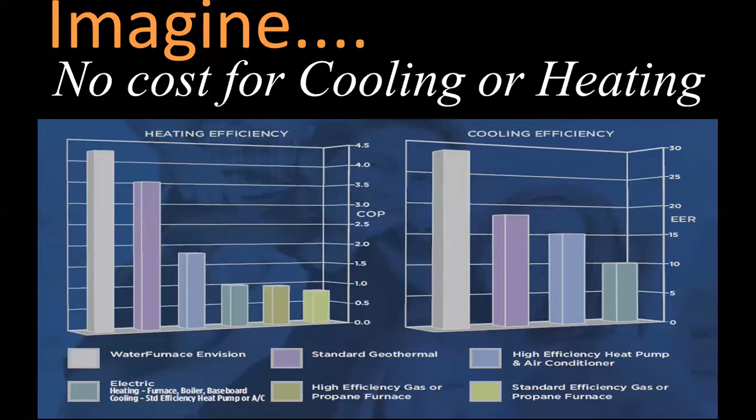These are buildings which are standalone from the electrical grid. There is no cost for running the air conditioners or for running geysers for hot water in the winters. They utilize natural resources. They live in harmony with nature. They're built in harmony with nature. These are the buildings which have the lowest possible carbon footprint. And that's truly what an earth-friendly or environment-friendly building will be all about. And that's what we'll call a net zero energy building.

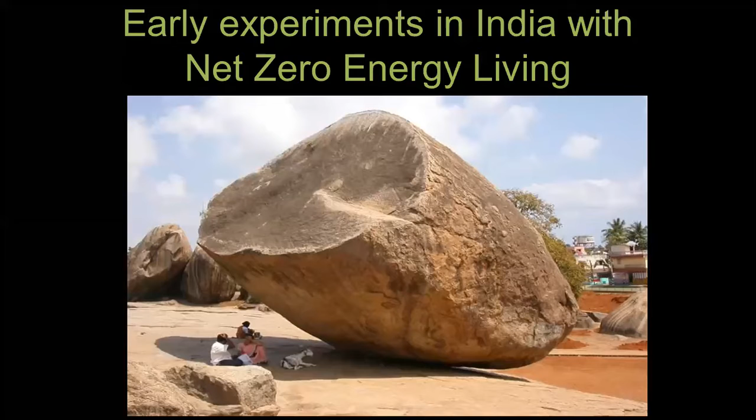The concept has been around with us for a long time. If you look at the history of mankind, over years, we have lived in harmony with nature. It's only in the last few decades that our greed took over. And in that process, we started extracting more from earth than giving back to her. And that's where the imbalance came into the picture, and we now have to start worrying about harmonizing with nature. Man has always in the past respected and worked around nature. And that's what we need to go back to, to achieve the status of net zero buildings.

Net zero buildings are broadly categorized into four. The first is net zero energy buildings. These are buildings where we are neutral with respect to the electricity grid, the grid which provides us the power which comes from the government. That means the power we draw is the power we send back to the grid, and hence we are zero with respect to that. There are many such buildings operational in the world today. When I say many, I don't mean hundreds and thousands. There could be a handful of them today, but this is where the world is going. There are examples of these buildings in India also. My guess would be somewhere in the range of about 10 to 20 such buildings in India at this point of time.

The next is net zero water buildings. These are the buildings where we are neutral with respect to the water coming to us from municipal resources. That means we do not take anything from the municipality. We are completely relying on what the rain gods provide to us. The focus of these buildings is on water conservation and storage. Such buildings are already being tried out. Currently, I may not be able to cite an example of such a building in India, but I can tell you that such buildings are currently under design.

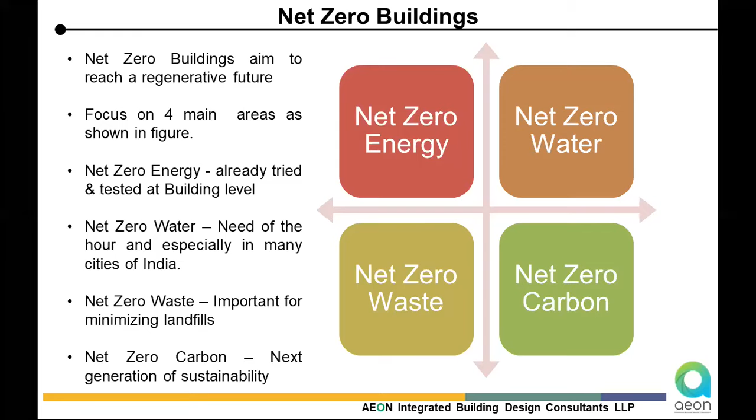The ultimate would be what we call a carbon neutral building. This is where we are in complete harmony. We are not adding anything to the carbon emissions. This would be the step we'd achieve once we have done net zero energy, net zero water, and net zero waste buildings. It will be a natural progression to move toward net zero carbon. Currently, we are a little away from this, but that's what we are aiming for, and that's where we need to go if we need to harmonize with mother nature.

How do you go in defining what net zero energy buildings are? Generally, in case of India, renewable energy source would mean solar, because God has given us plenty of sun energy. Since we have plenty of sun energy, that's what we typically like to refer, even though our country is blessed with wind resources, with biomass, but generally we speak about solar.

When you got solar energy, you can do generation when the sun is out, and that happens in the daytime. How do you run the building in the night time? There are two ways of doing that. One is that you store the electricity in batteries, but storage would mean it's expensive, and then it may not be environment friendly also. So what we do in such buildings is we generate excess power more than what we require for running the building in the daytime, send it to the electrical grid, the government grid, and in the night time draw the power back from there.

The electrical meter that you got, which is monitoring the net power which goes out and the power which is imported from the grid, the net sum of it should reach zero, and that is why it is called net zero energy buildings. Mind it, the world over, the term is net zero energy buildings, not zero energy buildings. It's a standard term, and that's how the buildings are defined.

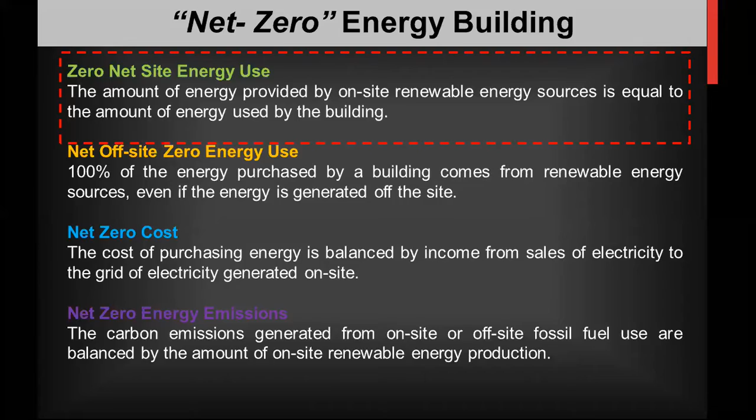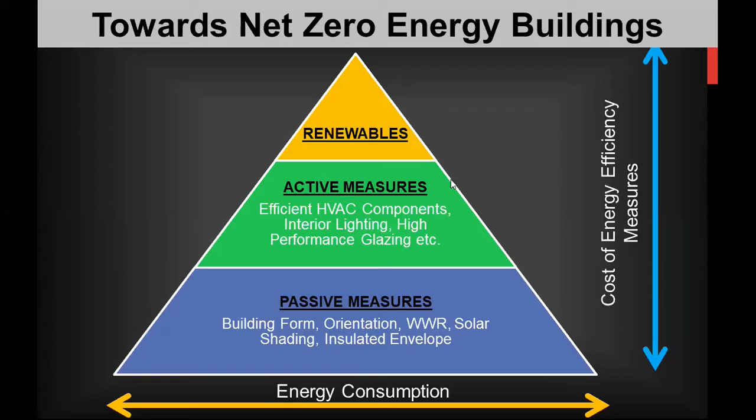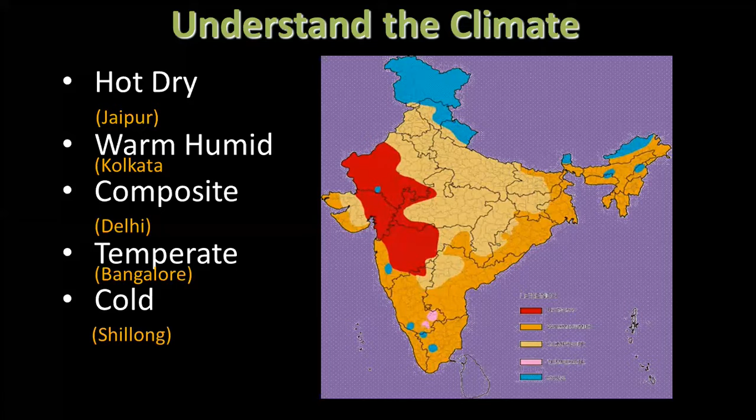All right, so that was the message of ASHRAE, how to go around designing net zero energy building. It was very similar to what I spoke about. Where do we start? Fundamental, go down to basics. And if you stick to basics, you can never go wrong. First, understand the climate for which you are designing. You cannot have a same building being built in a hot climate and the same thing being done in a city like Bangalore, which has got a different kind of climate.

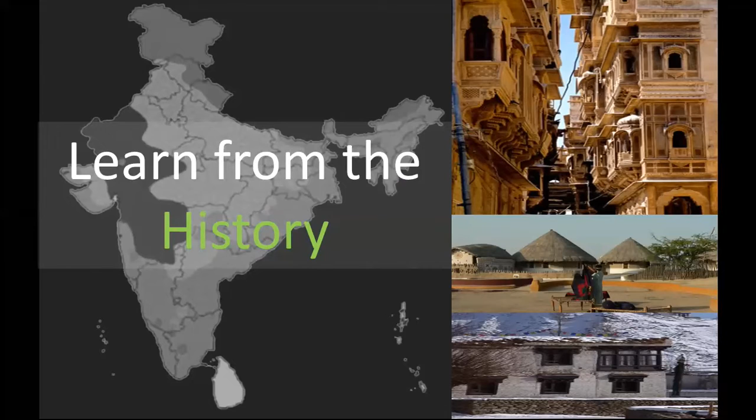Secondly, learn from the history. If you look at India, every city has a history of its own. Every city has a different kind of buildings which were done. Ask any architecture student, he or she will tell you the importance of that building design which was done historically by our ancestors, why it was designed that way. And if you look at those basics, follow that, you cannot go wrong. Then we got science like Vastu, Panchbhutas. It's all a science.

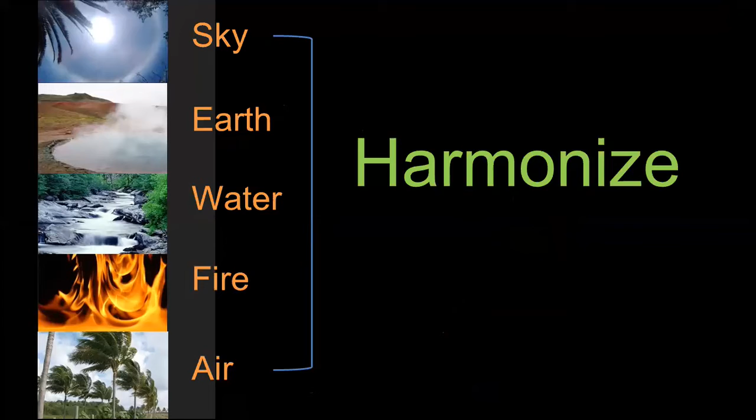Follow the science to the extent possible. What sounds right, do that. Finally, you harmonize with nature. Use the building technologies that we have, air conditioning, electrical, whatever the technology, not to fight with nature, but to harmonize with nature. And that's the fundamental of high performance building design and what we call net zero energy building design.

I'm going to take you through a couple of examples of net zero energy buildings which were done in India from the start. This is the first net zero energy building of the country, which was done in 2010-11. It's called Eco Commercial Building. It's in Greater Noida actually. And this was done by a chemical giant called Bayer. Bayer is a giant from Germany. They did it under their climate protection plan.

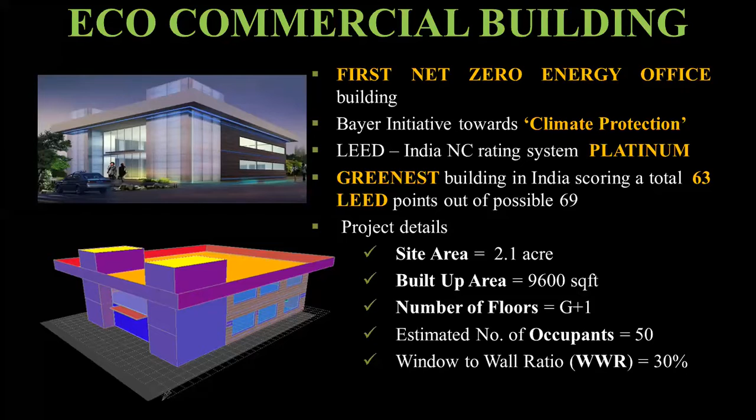The intent was to create a demonstrative building which will carry the message of what future construction would be like. So 10 years back, this building was made. In 2011, the building got completed. A small 10,000 square feet facility. When it finished, it became the greenest building in India at that point of time. I'll showcase to you the process that was followed to construct this building and how we got a net zero energy rating, or the performance, out of it.

You can see here, just by doing the right orientation, whether it's north-south, east-west, what is the best orientation? You use software to rotate the building every 45 degrees to find out the best orientation. And that orientation, once selected, saved us 1% in the annual energy bill. You will say, arey, 1%, is this what all the trouble is about? Wait and watch what happens as we go along step by step.

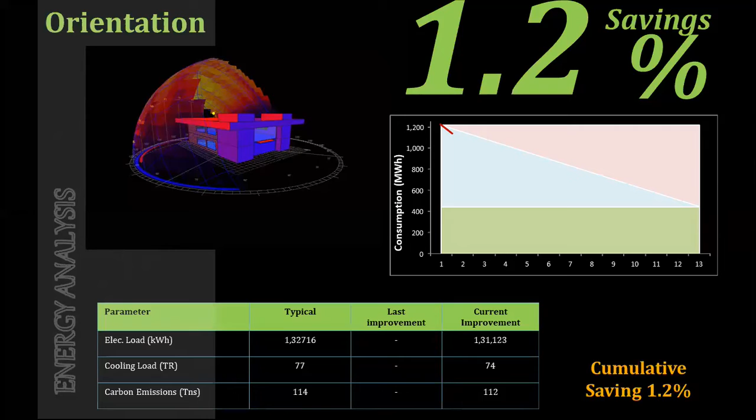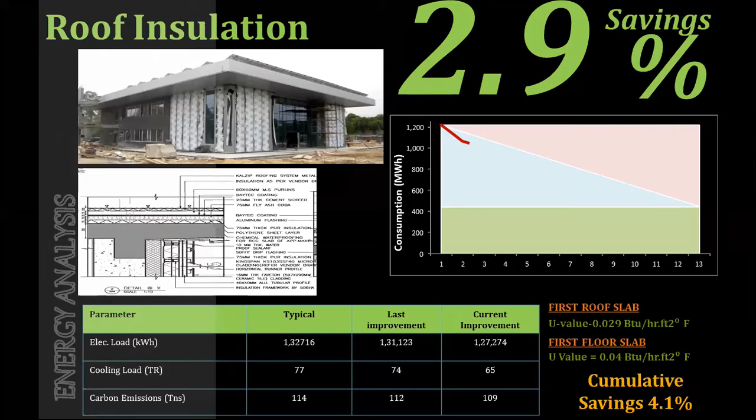The second thing we did was put in roof insulation. We are a country which is hot. Most parts of our country have a hot climate. And for us, keeping the heat out matters because we have air conditioners running inside. This building saved 3% of its annual energy bill by going for roof insulation.

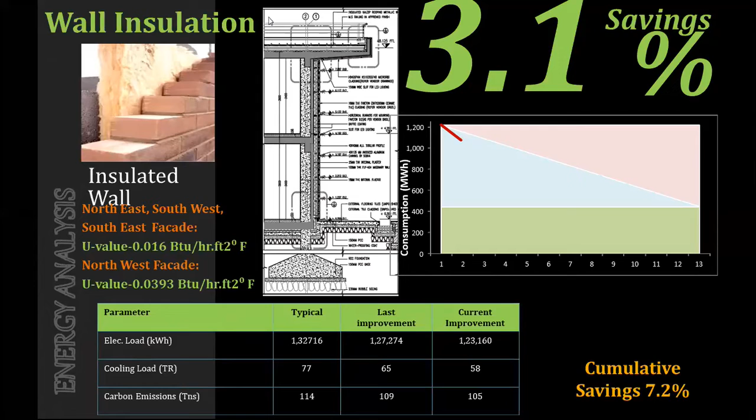Similarly, wall insulation. How many of us actually put wall insulation in our buildings? Very few, but that's the way of the future. If you're making a building in the Middle East or Europe, wall insulation is compulsory. In India, it's going to become so in the coming days. Already the government is working on that idea. The codes are out. If you look at the ECBC code, that's what needs to be done.

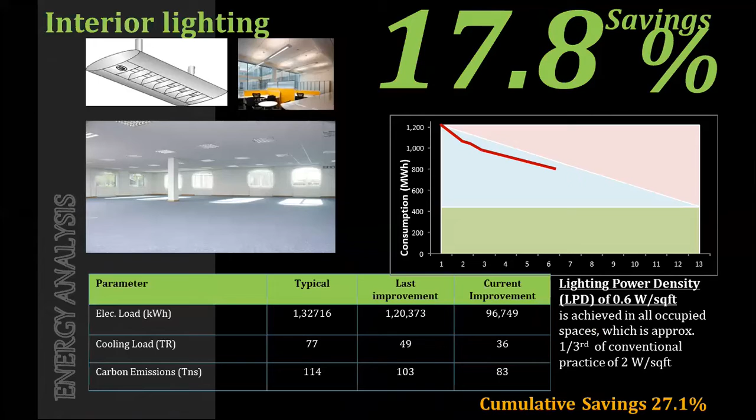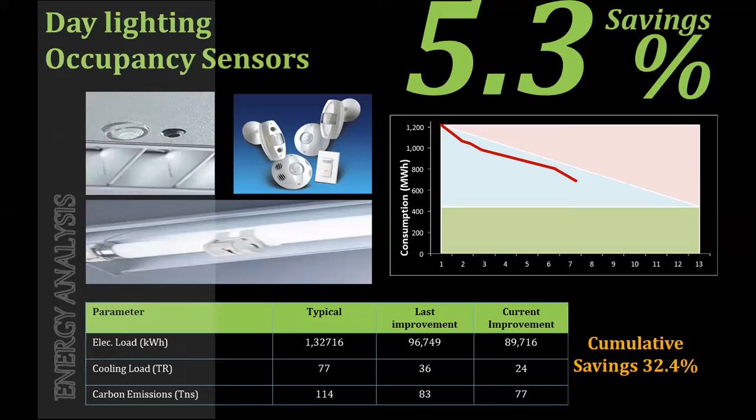Look at the window assembly: a double glazing unit and the right window wall ratio help you save further electricity. The right kind of interior lighting. Daylight sensors, that means using sensors to switch off artificial light when it's not required. If you get adequate daylight, why do I need to run the artificial light? Similarly, occupancy sensors in places like toilets, pantries, mechanical rooms, where nobody goes or goes once in a while. If I'm able to switch off the artificial light when it's not needed, I'm saving energy.

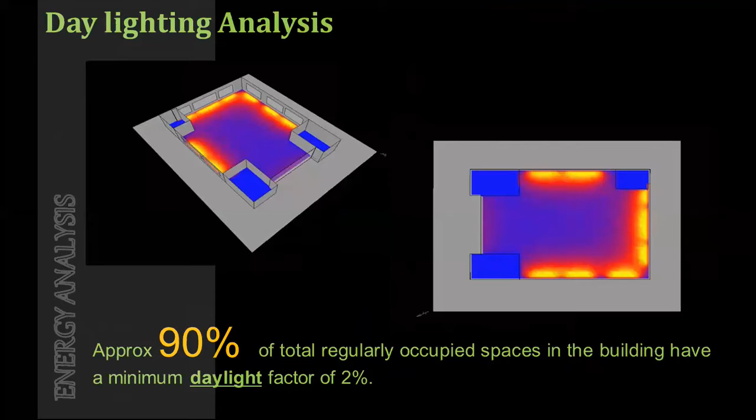External lights, using good quality, energy efficient external lights. Maximizing the daylighting. In this building 90% of the areas were daylit. Looking at equipment like photocopiers, printers, computers, buying the ones which are most efficient.

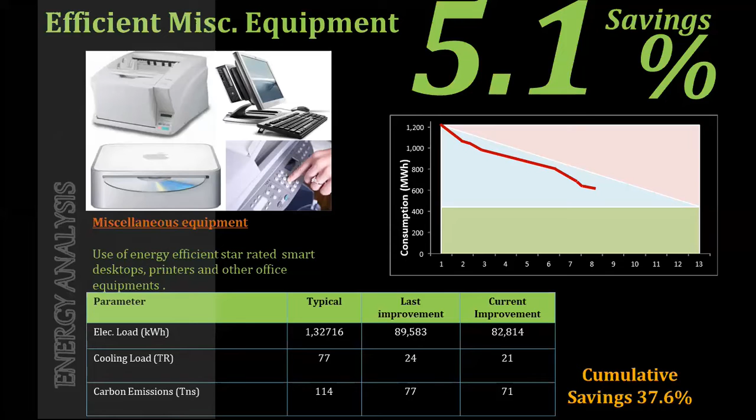I remember the time when a personal computer used to consume about 250 watts of power. Today, that power consumption is down to less than half, and it should be our endeavor to pick equipment which is least power consuming, because it's running most of the day, and you're saving energy by choosing the right ones. Similarly, the right kind of air conditioning systems.

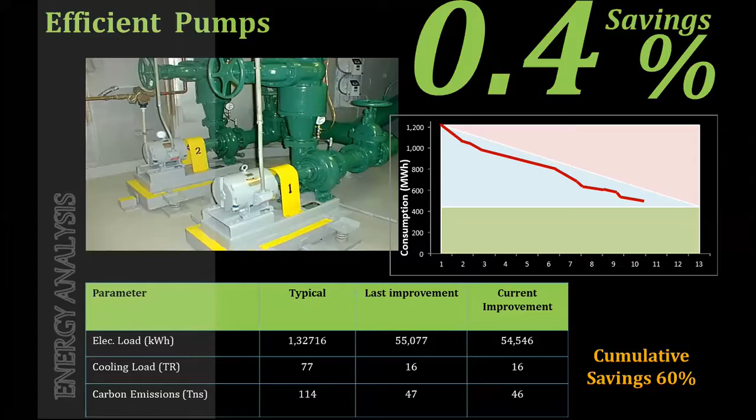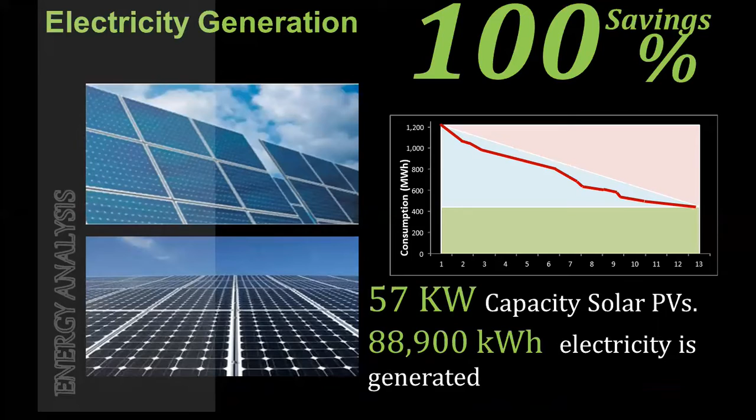I'll take you to where we reached through the step-by-step process, not going through all the details. We saved 60% power compared to where we started from. And at the end of the day, once we saved that energy through energy efficient measures, we put 57 kilowatts of solar panels on the roof to get what we call net zero energy performance. These are images of the same building in 2010 when construction was going on.

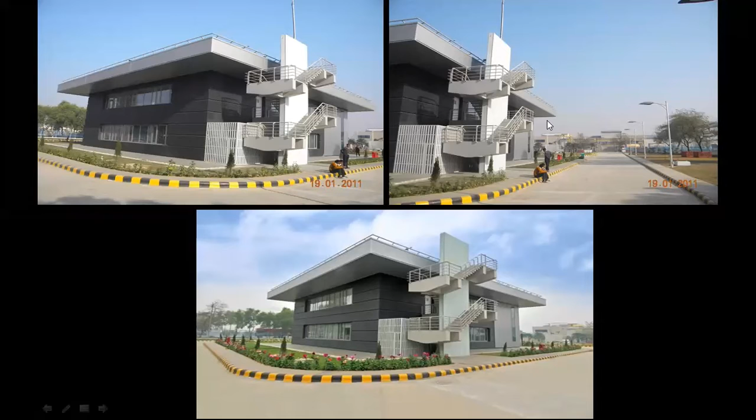You can look at the daylighting inside. And this is in 2011 when the building was finished. And again, look at the daylighting inside. These are some of the images from outside the building. And you would notice the tall overhang which is there on the roof, which you can see right here.

That overhang is actually protecting the windows from direct sun coming inside, but also simultaneously providing an additional area on the roof to put the solar panels. So 57 kilowatts of solar panels on the roof.

And once the building started operating, after 1 year in 2012, when the performance was noted, it was found that the total number of units generated by the solar panels was 72,000 units. Consumption was 64,000 units. We ended up generating an excess of 8,000 units and sending it to the grid.

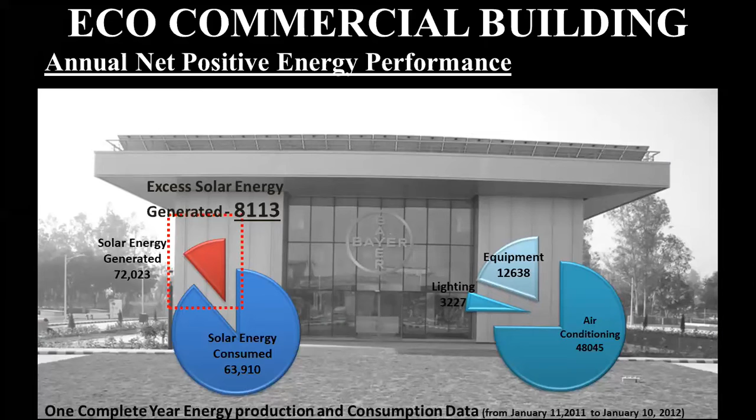That means our electrical grid became richer by 8,000 units. It was a net addition to the grid, and the building performed as an energy positive building even beyond our expectations.

Another building that came up thereafter was the Ministry of Environment and Forest, again in Delhi. This is called Indira Paryavaran Bhawan. It's at Jorbagh in Delhi, those of you who know this place. It's a 500,000 square feet or 50,000 square meter building.

Big building. And on top, the wings that you see there, those wings are nothing but housing the solar panels. The building is completely run by the solar panels which are on the roof. It generates 1 megawatt of power through the solar panels to meet its need.

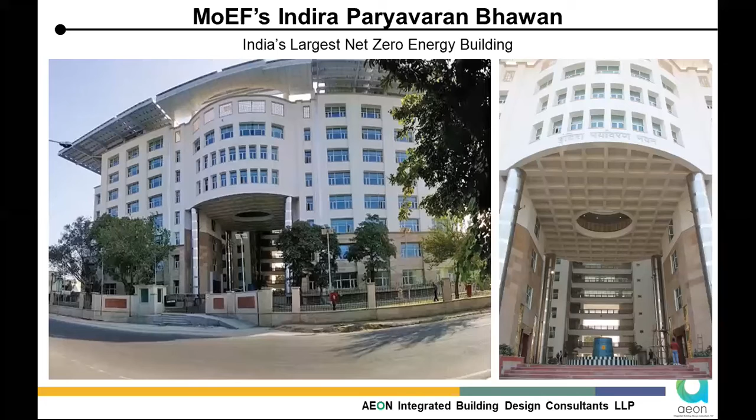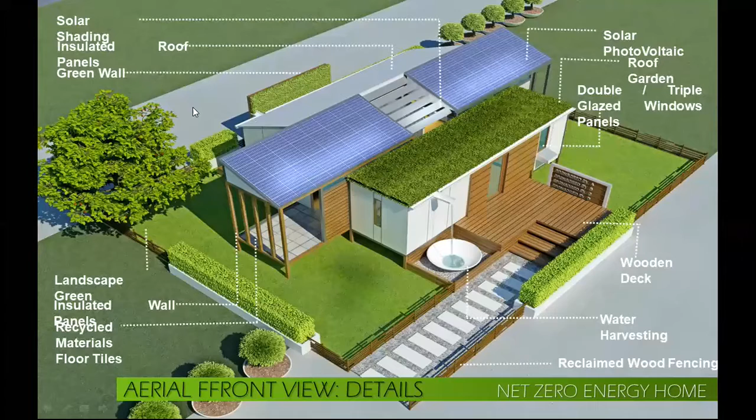The third building in the series that came up was Shunya, which is a net zero energy house. Those of you who were there on Monday, the speaker there, she had presented the same house called Shunya. It is made out of 4 old freight containers, where the doors and windows were cut out. A frame was put on the top for mounting the solar panels.

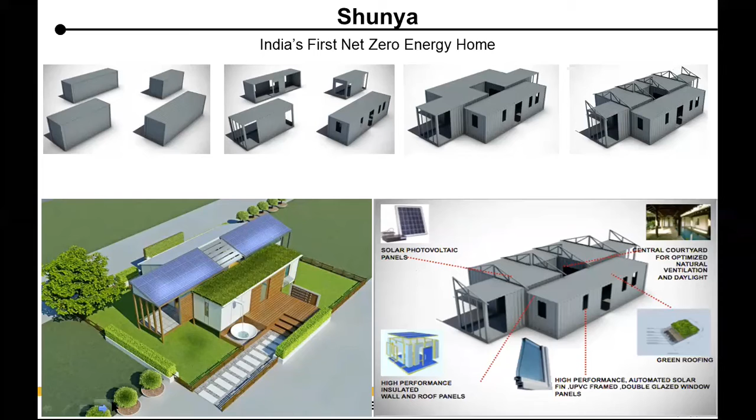On the left bottom is the conceptual image of that house as you see there, where the intent was to showcase what an ideal future living would be like. The house has rainwater harvesting, composting, green wall, kitchen garden, renewable energy, anything which makes the building sustainable.

There's another one, which is a unique project here in Delhi, which is the first net zero energy park of India. This is developed by the Delhi Metro Rail Corporation, DMRC. It again meets its entire power requirement through the solar panels itself. And that's what makes it unique.

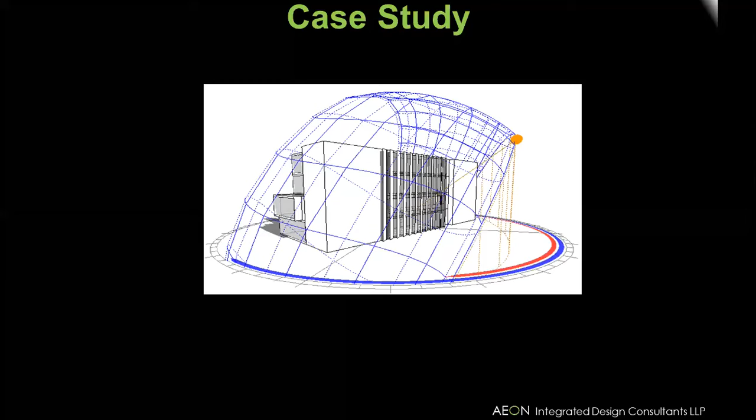I'm going to take you to one more case study before we start moving to the final images. This is a case study for a building which is done in Kolkata. It's a small building which is tall. The problem with a tall building is that you have very little area to put the solar panels. That means you can put it only on the roof. And that area being so small, you're not able to meet the power demand of the building itself.

What we decided here was to wrap the building with solar panels. Now that's easier said than done. If you wrap your building with solar panels, you'll have no daylight coming in. There'll not be any view for the people. How do you make that efficient? A lot of these questions come into the mind. This is a perfect example of how those questions were handled by close working of an architect and an engineering company to solve the problems.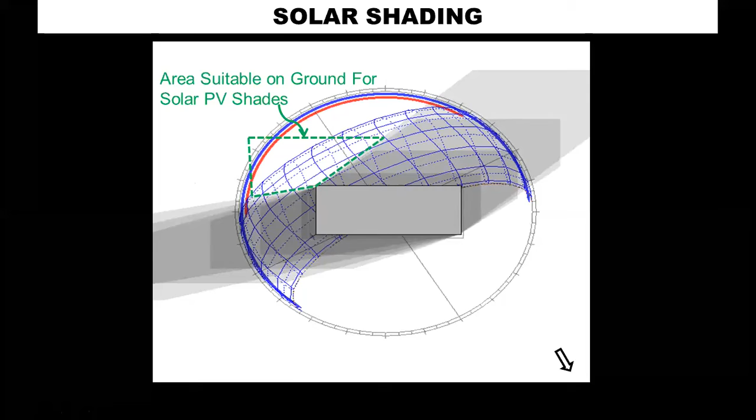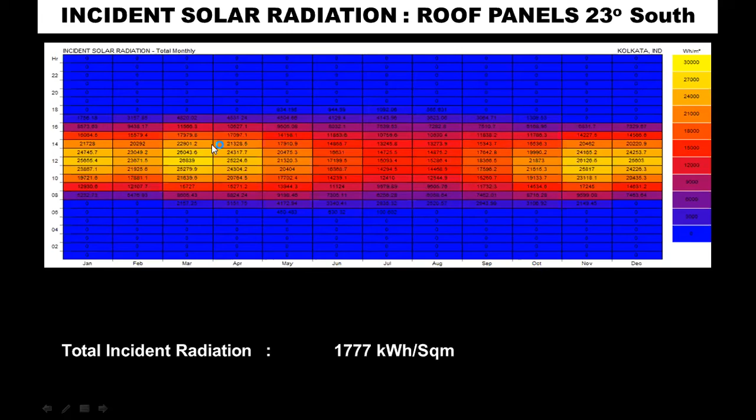All the 4 facades were studied with respect to the solar radiation. What you see here on the screen is the y-axis showing you time of the day and the x-axis showing you the year. All these orange, red, yellow, this is the intensity of solar radiation depicted by the scale on the right. And you can see here we are trying to find out when the solar radiation is maximum, how it can be harnessed.

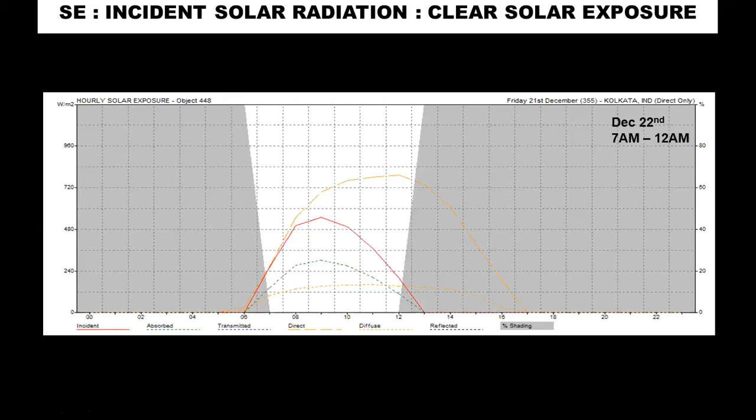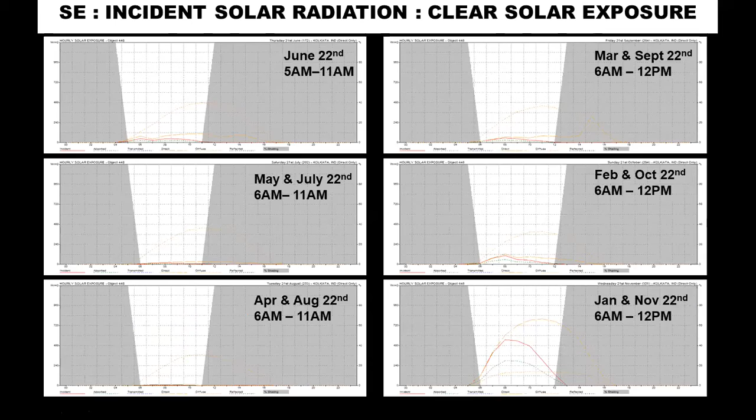Next, we are looking at the solar exposure. How many hours in the day do you get the sun on the facade? So such studies are being done for all the 4 facades and the roof for all months in a year, all days in the year when the sun is there. That helps us to determine the total renewable energy that can be generated.

Finally, the floor plate. Looking at the floor plate, we are finding out how to make it daylit. If I do not have any solar panels, this is what the daylighting looks like. On the top, you see a very bright glare patch. That means the sun is coming unhindered inside. Nobody will be able to sit close to that window because the sun is very strong. Similarly, on the right, this is what we call a glare patch.

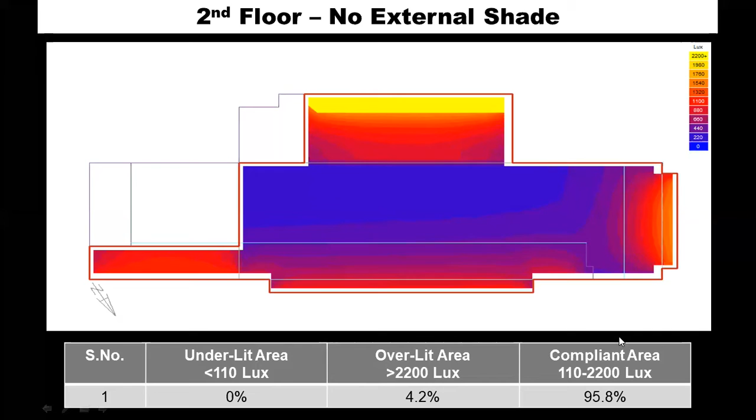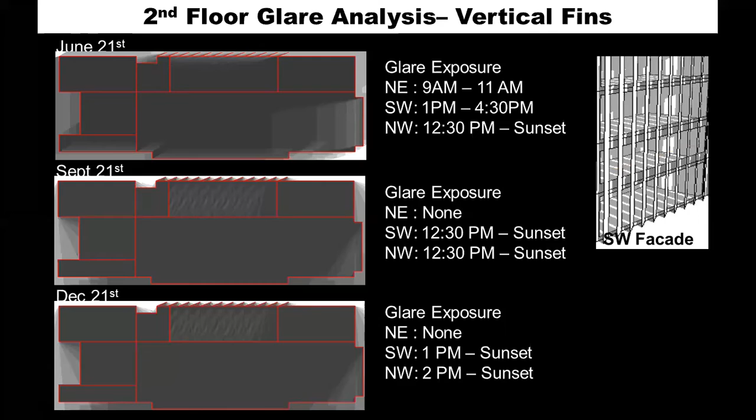Trying to solve that problem by putting the solar panels in an inclined manner like this, so that the people inside can get a view outside. There's no glare on them and the daylighting is not compromised. So this is the exercise being done in terms of arriving at the right shading, right angle and right glass. So these iterations were done for that.

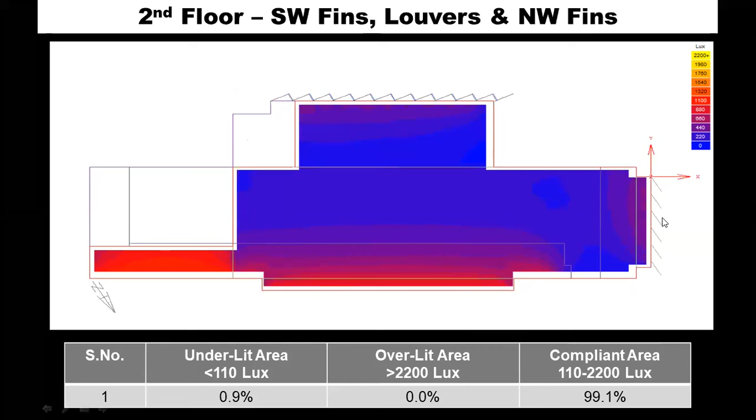And let me take you to the final one. And you can see here, this is the final floor plate. 99% of it is daylit. All the glare patches are gone. And look at the angle of the solar panels, which was determined in order to get the best of what we are looking for. Once that was done, the similar exercise was done for all the 4 facades and the roof. And finally, it was quantified in terms of how much power it is producing.

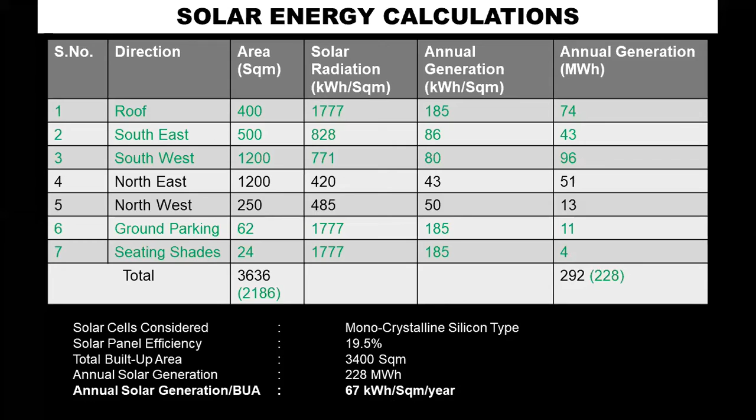What you see here, the building produces about 228 megawatt hour of power throughout the year. And if I divide that with the area of the building in square meters, I get a unit of 67 kilowatt hour, which is a unit of electricity per square meter per year. This is defined as Energy Performance Index, EPI.

Then the engineers started working on it, where the engineering of the building was done backwards. That means it was fine-tuned till the time the consumption was able to match the generation happening from the renewable energy. So it's a perfect example of a right design by the architect, cooperation by the client, and finally complemented by the design by the engineer.

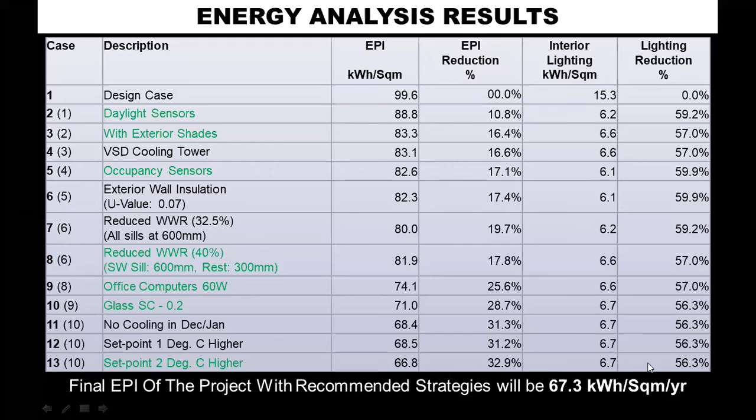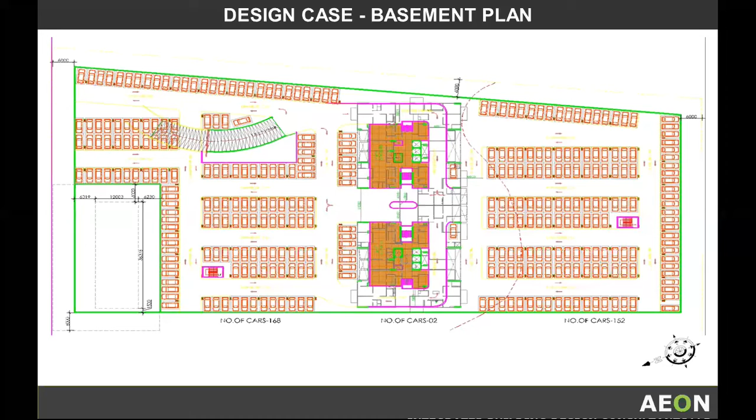Similar examples have also been done for getting the right kind of, let's say, basements. Now, whenever we talk of basements, the image that comes into our mind is of a dark, dingy place where mechanical ventilation is required. This is where efforts to make it rightly lit, daylit, naturally ventilated have been made. This is a basement completely underground. You can see here 4 large cutouts were created around the building which are bringing in the lighting here.

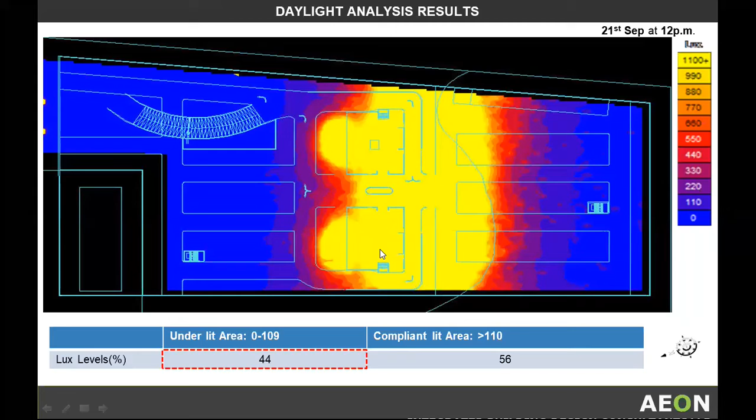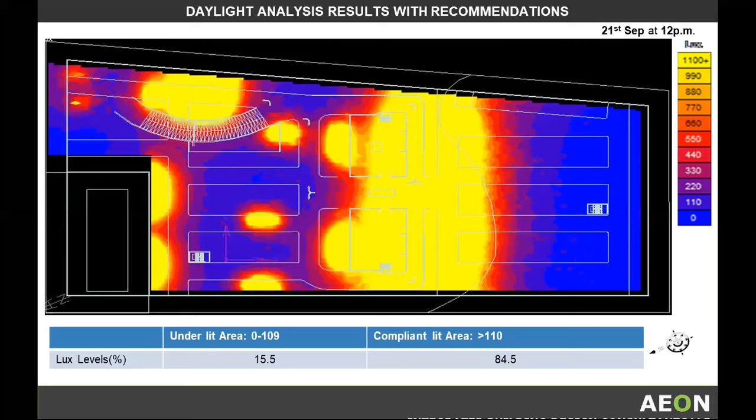Along with that light, you can notice, those of you who can see the movement on the screen, that's computational fluid dynamics, to showcase to us the strength of the air currents that are being formed by the natural wind. More such cutouts at strategic locations helped us to get the same basement to 85% daylit. I will not require any artificial light in the daytime.

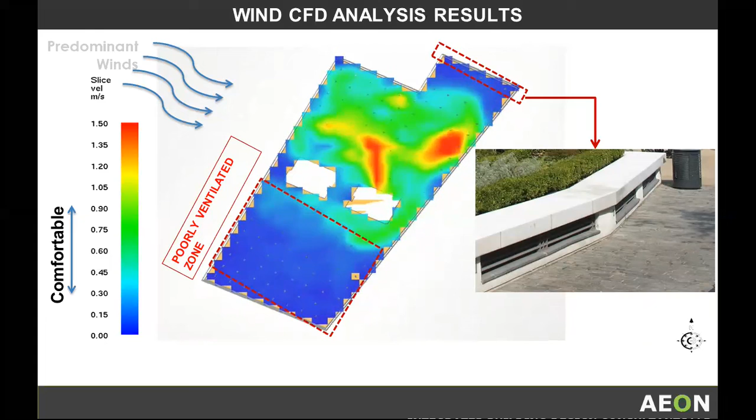And look at the strength of the natural ventilation currents. I don't need any ducting. I don't need any fans, no power to run it. Everything is naturally ventilated. That's how the technology is being used to work with nature, which is what I was trying to explain earlier.

Last few slides, I'm going to show you of my own office where I operate from, where I'm sitting right now and talking to you. Normally, when we talk about green, the image that comes into our mind is of a big corporate, a large company, a rich company that is making their building green. Here, the attempt is that in our daily lives, you, me, all of us can convert our workplace, our homes into green buildings, into net zero energy buildings to get the benefit of what I have spoken about so far.

This is an office in Noida. I invite all of you to please visit this. You're more than welcome, possibly after the COVID times are over. We've had many visits from the schools in past, and I'd like to extend the invite to all of you, IGBC Green chapters. Come and see that.

This office has got a platinum rating, which is the highest green rating given by the Indian Green Building Council for the buildings in terms of energy efficiency, in terms of environment friendly quotient of it. It has also got another platinum rating, what is called on a health and well-being scale. Health and well-being is all about the well-being of people inside, how happy the people are working here. And I can tell you, each one of them enjoys being in the office.

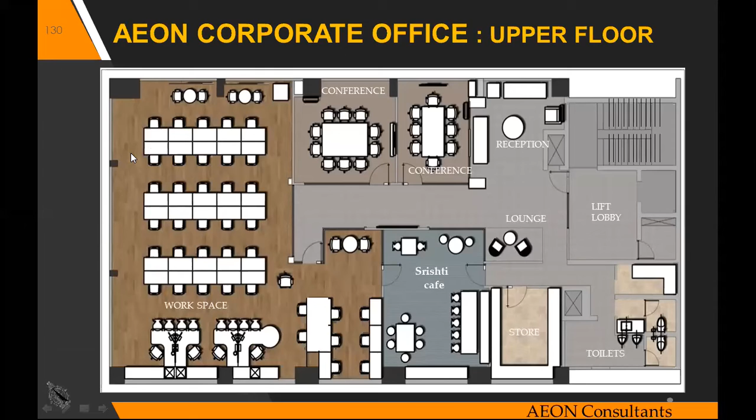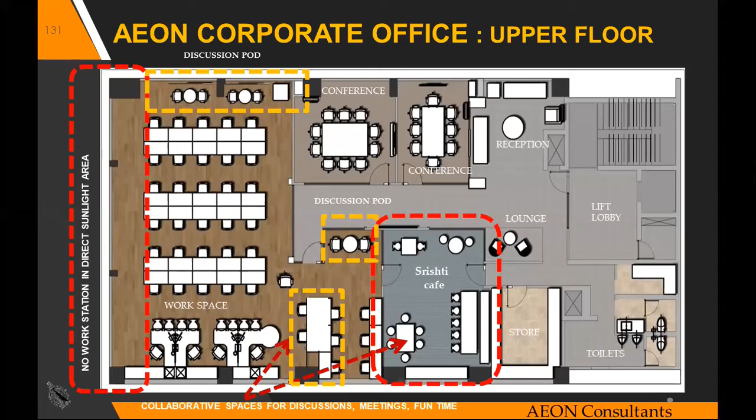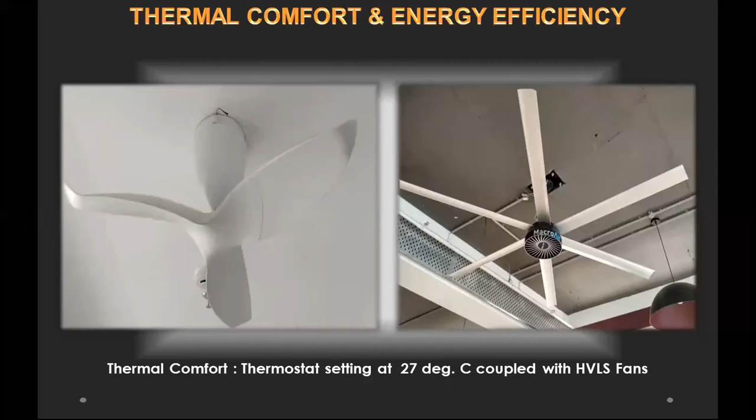We also maintain a temperature of 27 degrees on the thermostat with these fans being used. These are special fans which do not produce any sound, but they produce air movement. And at 27 degrees, when you've got enhanced air movement, you feel like 23, 24 degrees.

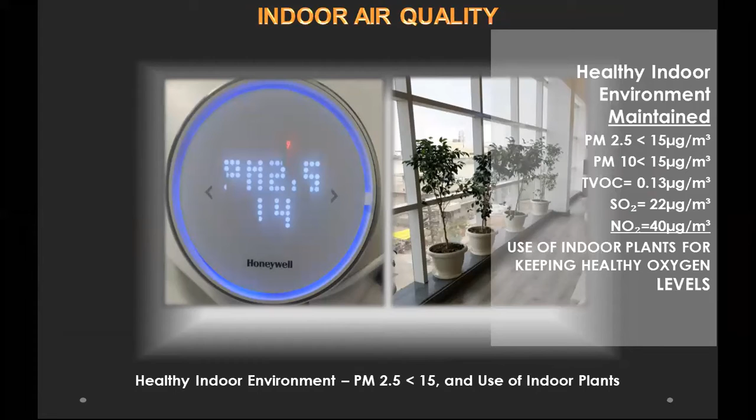We've got air cleaners, and look at the PM 2.5 levels. Now, those of you who follow the ambient air quality challenges which our cities in India have, you would know that Delhi is one of the most polluted cities in the world, where the PM 2.5 level crosses 500. In this office it is less than 14, which is safe as per WHO standards.

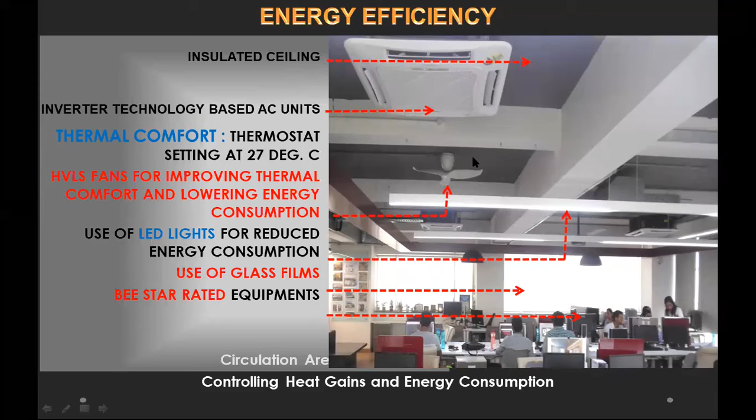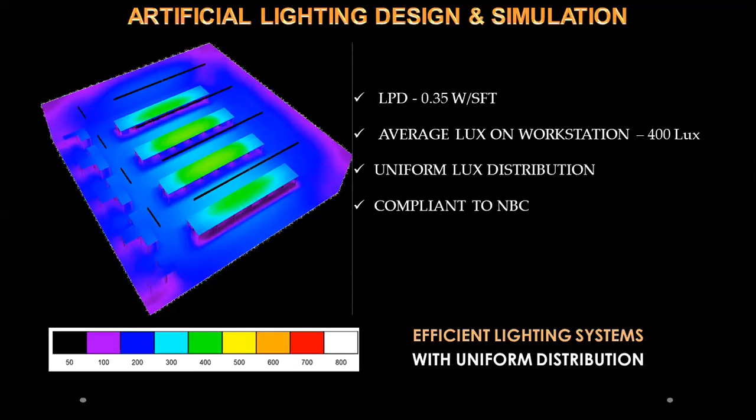All equipment are energy efficient, and this is what the typical office floor looks like. Air conditioner, fan, air conditioner, fan, and the entire ceiling is insulated. This is how the lights are planned. You can see a computer simulation model, in which you can clearly see the lights are falling on the workbench only. Outside the workbench, there is hardly any light going out, so that light is being completely utilized, and we are not over lighting the space, we are right lighting the space.

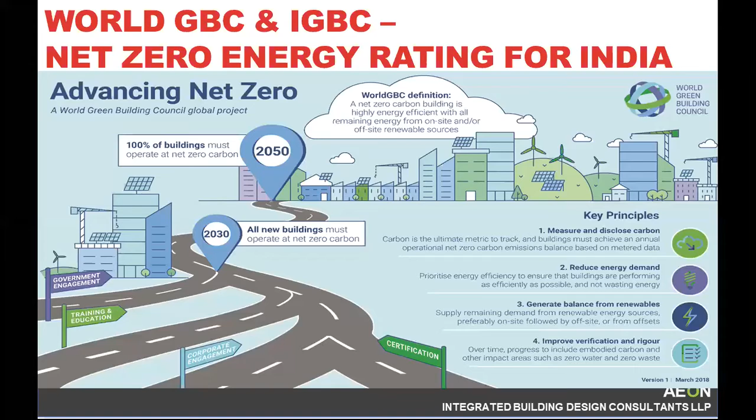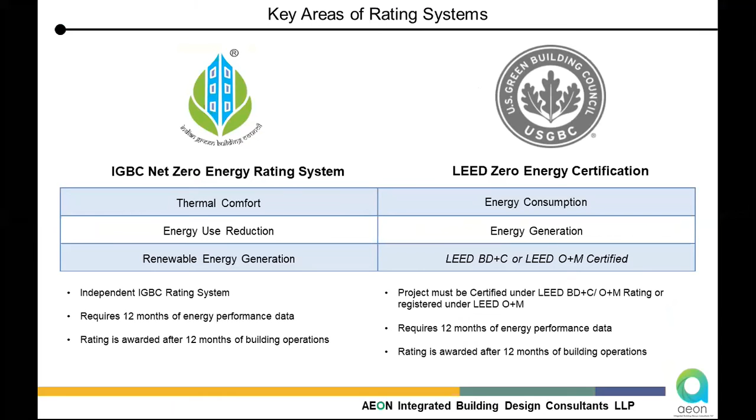Now we are looking at a net zero energy rating by putting the solar panels on the roof. And that's how simple it is to make your office or workplace net zero energy. There are rating systems now available from the Indian Green Building Council, IGBC. There is a rating system called Net Zero Energy Building Rating System, where you have to provide 12 months data, 1 year data, and prove that whatever the consumption took place was met through the renewable energy source. Once you demonstrate that, you are eligible for a net zero energy building rating. The focus of the rating system is exactly what I told you.

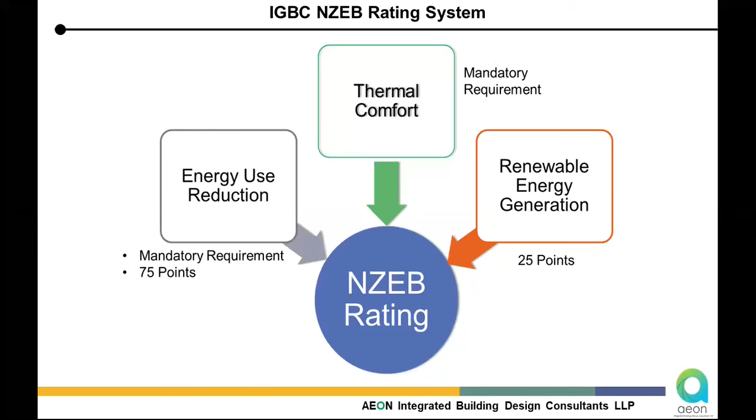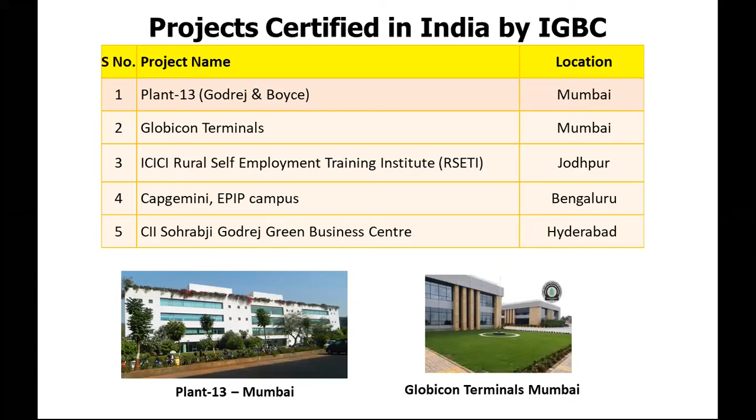The intent is that we move to an era where all our buildings are net zero energy, but till that point of time, today, there are only a handful of them, as I said earlier. In India, there are hardly any, between 10 to 20 buildings we have. And these are 5 of them which have been rated by the IGBC.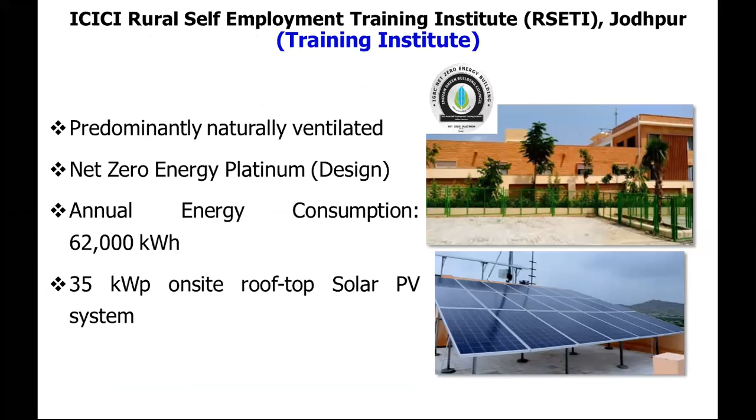Those of you who stay in Delhi, Nagpur, and other places, you would note that government has put solar panels on roof of every metro station. Most of our metro stations are now going with renewable energy. Cochin Airport is a net zero energy airport. The entire roof of the terminal building is covered with solar panels, meeting its demand through the renewable energy that is generated there.

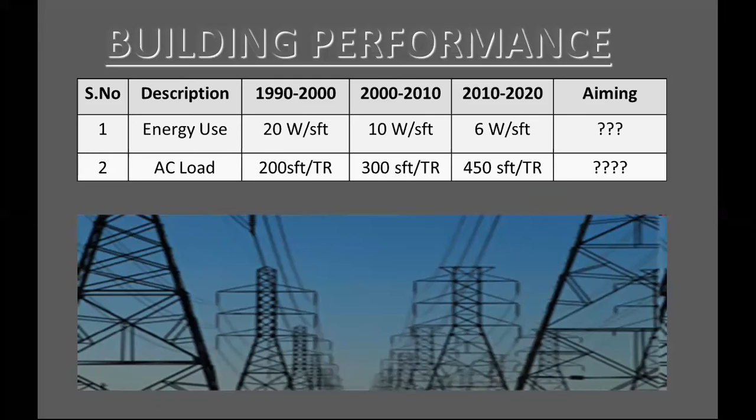If you look at the universities coming up, IIT Jodhpur, I heard about Nalanda universities. All of these are aiming for a net zero energy performance, where the intent is that the entire energy is met through a renewable energy source. These are large projects, and you can extend the same thing to your own house, your own office, because it is not tough to achieve that status. It's all about doing the right sizing, right design, right thought process, and right operation.

A building which is well designed and not operated correctly can still have a problem in terms of achieving a net zero energy status. That's why you not only have to design it right, you have to operate it right, carefully, keeping in mind that all the wasteful energy is taken out of the system and we are only using the energy that is required. And that's what requires a mindset change in how we think and how we operate our buildings today.

Net zero energy buildings are the way forward. Most of the governments across the world have set their target very clearly on where the net zero energy buildings would go. Germany is today meeting 70% plus of its power demand through renewable sources. A lot of European countries have a clear target that between 2022 to 2030, all new constructions would be net zero energy construction.

Government of India is also not far behind. Bodies like Ministry of Environment and Forest, Bureau of Energy Efficiency, MNRE are talking about the same concept, and you will be hearing more and more about it as you start working professionally in your field. Most of you would be students, and that's why I said once you come out and start working as professionals in the next few years, this is what you will see as a real challenge being put to you, and the building industry would be moving in this direction.

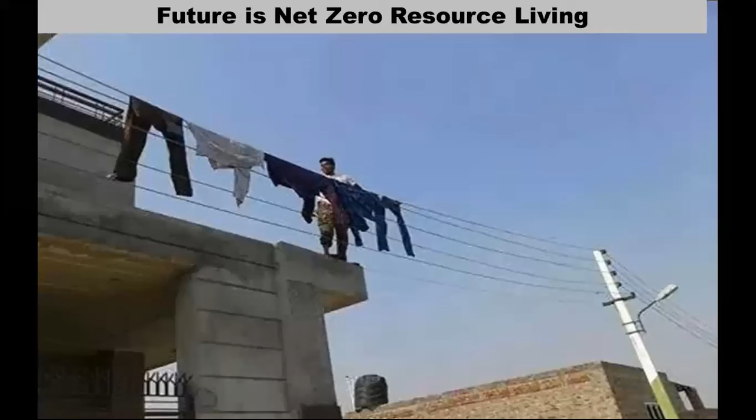This is where we want to go in future, where we are using our power lines for a better purpose. Once we are meeting a demand through a renewable energy source, I definitely don't need these. I can use them for drying clothes also.

Thank you very much. I hope you carry the message back to where you come from, and build responsibly, live responsibly. Thank you so much.

Thank you, Ashish. That was honestly a wonderful session with a lot of case studies. There were a few points which I want to talk about. It was about the mindset, which is about the right design and how do we operate it. The entire flow of the presentation was brilliant with the pale blue dot, where you spoke about how we need to live in harmony with nature, and about the lovely case studies that you showed.

And I think the best thing was your office, which is truly working towards a sustainable lifestyle. And I think when you lead by example, it is one of the best ways to learn it and do it yourself. So thank you so much, Ashish, for the wonderful presentation.